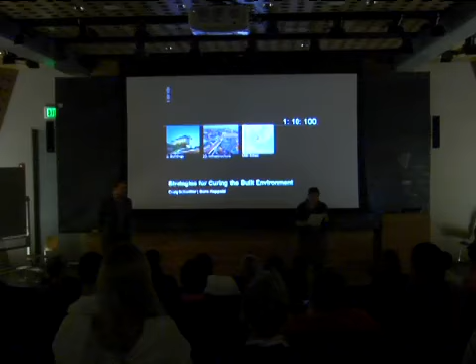Which is a firm that from its very inception has been concerned with the intersection of technology and engineering with art and architecture. To quote the founding partner, Sir Edmund Happold, "A world which sees art and engineering as divided is not seeing the world as a whole. It is technology that is creative because it gives us new opportunities."

The firm has been very much at the forefront of the intersection of engineering and architecture and has consulted on such projects as the Millennium Dome in London and the glass roof on the British Museum with Foster & Partners. The firm consults on a multidisciplinary array of technology applications for designers spanning structural, mechanical, geotechnical, lighting, facade, sustainability, and does these things at the three scales of the building, infrastructure, and the city.

Craig Schwitter holds both bachelor's and master's degrees in engineering from Johns Hopkins and MIT respectively. He has worked on numerous sustainable buildings and planning projects in both the United States and the United Kingdom, and has lectured on sustainability, integrated design, and innovation of engineering. In 2000, he founded the first North American office of Buro Happold, and under his leadership as managing director for North America, the firm has expanded across the US to major metropolitan areas and now has 200 employees. His focus is on integrated engineering with a special emphasis on low carbon and high performance design building issues.

In 2001, he was appointed the first Bedford Distinguished Chair of Architecture and Engineering in the Architectural and Civil Engineering departments of RPI. Recent projects that the firm has undertaken out of the US office include the High Line in New York, the RPI Experimental Media Performing Arts Center, the Visitor Center at the World Trade Center Memorial, and the Walton Museum in Bentonville, Arkansas. And he wouldn't let me mention any of the awards that the firm has won, but I think it's important to note that in the last year alone, the US operation of Buro Happold has been recognized for engineering excellence across a series of fora that stretch from lighting design to the American Institute for Steel to the Royal Institute of British Architects. So, welcome.

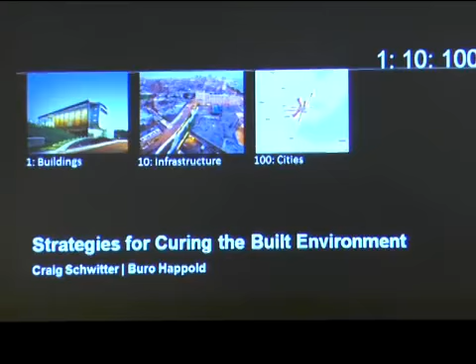That was great. Thank you very much. That's a little embarrassing, all that stuff.

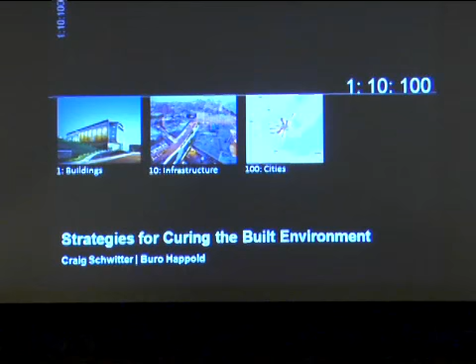But anyway, I'm here to talk about the work that I do and the work that my firm does. I'm an engineer. I like being an engineer. Just want to make sure everybody knows that in the room. But I am used to being surrounded by architects, and I have, after about 20 years, managed to befriend most of them and have good working and collaborative relationships. I want to talk today about really what's on my mind after half my career at Buro Happold. It's been a great place.

I've grown as a structural engineer into doing infrastructure and at the moment doing city scale type work. And I wanted to really show this type of connection that we see as a firm between different scales of projects, between 1, 10, and 100. I continue to see the world as a very connected place, and solutions and strategies and value to be part of that kind of connectivity between these issues.

So just to kind of riff on the theme, really the biggest issue is curing our environment. Our environment is dying. It's being killed by us, by design, by intentional things that we do and we've been doing for many years. And we have to stop. And I just want to try and show some of the ways I think that we can start stopping that and hopefully correct the course.

My firm is global, which is a benefit for me because I get to work in both, shall we say, Western markets or shrinking markets and emerging markets or growing markets. We work in places like India where you're putting up a building every other second. We work in places like Detroit where we're actually working to restructure infrastructure to re-densify the core of the city. Very, very different types of problems.

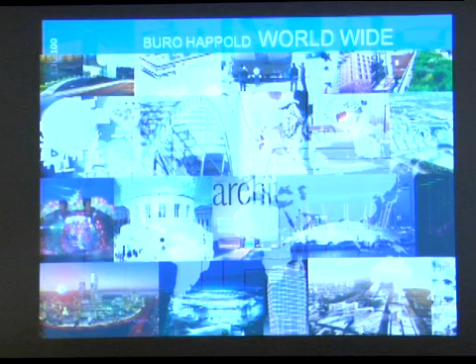But we do have offices here in the United States, which is where I tend to operate. I live in New York, but I also work from New York and Los Angeles on lots of projects around the world with great collaborators. And this is just a kind of a hodgepodge of some of the stuff that we've done. I've been involved in things like the Millennium Dome, stadiums, cities, new cities. This is 60 million square feet in the desert in Saudi Arabia.

The Louvre Museum in Abu Dhabi. Also, as my career has evolved, I've been very interested in structural technologies and lightweight structures, but that idea of lightweight systems and touching the earth lightly has kind of evolved for me. And it's evolved in large part due to what Ted said as a culture in our practice.

Ted passed away in 1996. I was really lucky as a graduate engineer to get to know him. He used to drink these Bucks Fizz things, and he'd give you a book and say, read this book on Jean Prouvé, and he was great. But he had this idea that there's a bigger picture out there.

Even if you're an engineer designing a beam or an HVAC system or lighting or a road network or sewer or street grid or planning for carbon reductions, there's a bigger picture. And this is something I go back to virtually every day. How are the things that I'm doing today impacting things, impacting people? And this is the issue.

The carbon footprint is everywhere. It's amazing. I travel a lot, and it's on the tip of everybody's tongues everywhere, except for the United States, where we're somehow politically putting our heads in the sand yet again and thinking that carbon as a problem doesn't exist. But it does, and we'll get through this nonsense and realize that we actually lost a couple of years of really good productivity to actually solve this problem.

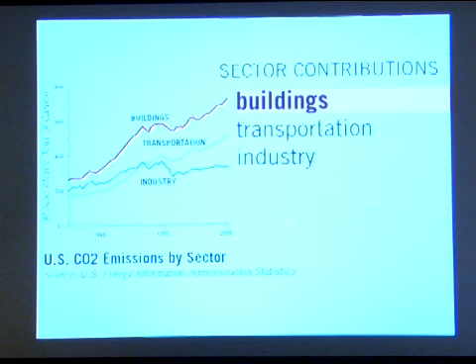Now, some background here. Hopefully everybody knows this, but I'll just repeat it just in case you don't know, that buildings take up the most important area in carbon. Buildings take up between 40 and 50% of carbon emissions in the United States. It gets worse, because if you're in a dense urban environment, 75 to 80% of your carbon's coming from buildings. Because you've actually already optimized your transportation networks, and your industry is starting to move out, or has moved out, or is a smaller footprint.

So if you're looking at dense population centers like New York, who set carbon limits for the 2030 challenge, 18 years from now, this is a major issue. What are you going to take, 75% of the buildings away in New York City? I mean, it is a very difficult, knotty problem.

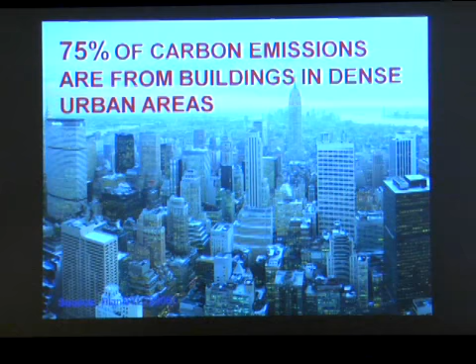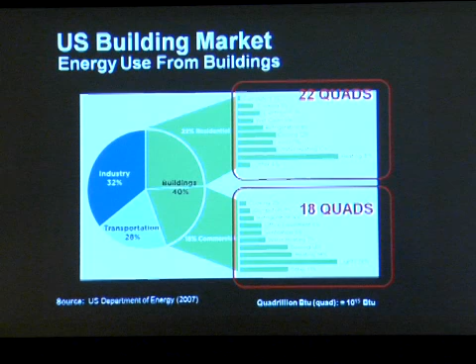And this is, just to give you a sense, residential and commercial quads of energy, or big units of energy, just showing where energy goes in buildings. Cooling, refrigeration, electronics, office equipment, water heating, lighting. Lighting actually jumps out at you here, especially in the commercial area. Almost a quarter of our energy goes into lighting in buildings.

And another element to really understand, and this is particular to the US marketplace, is that buildings have 70% of our electrical consumption. That's an important factor. So buildings drive electricity consumption. Primary electricity is generated by coal in the United States. And that's a big issue in terms of unlocking strategies for energy reductions in buildings.

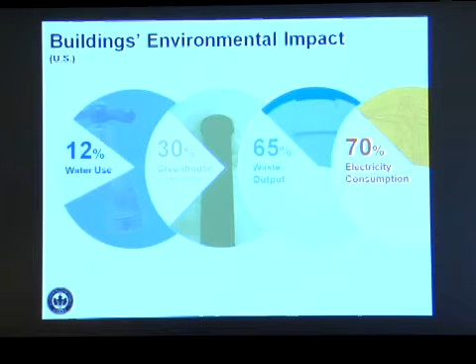So, how does the market respond to all this? Again, I'm a market guy. I'm not a Republican, thank God, but I do believe that we have to find these economic linkages to solve these problems. And the market is pushing.

LEED has done a tremendous amount, and there's all kinds of other systems around the world. If everybody thinks that LEED is the only one, it's not. BREEAM, and Estidama in the Middle East, are all very aggressive. And one of the nice things about these systems is they're setting benchmarks and consistently lowering the benchmarks. This is actually just simply regulation, which is good.

I was at a conference a couple of weeks ago with the ex-director of the EPA, Carol Browner, and we were talking about regulation. It's amazing how regulation is seen as a bad thing right now. But regulation for this problem is necessary. LEED is important. When Boston says all buildings will be LEED Silver, and LEED then reduces the energy benchmark the next year, all buildings in Boston in the future just got more energy efficient, under the radar screen. No politics at all. So this is a very important issue about how the market's responding.

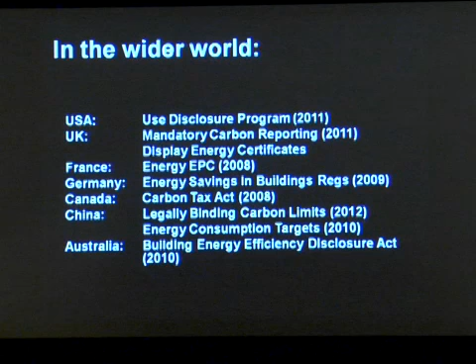In the wider world, you've got a whole series of things. I would say that the USA is behind, but on a state level, it's actually pretty ahead. But on a federal level, it's behind. But UK, France, China actually has some very stringent legally binding carbon limits coming up next year. That's exactly why we're doing a lot of work in China right now on low emissions and low carbon development.

And companies, corporations, as evil as they may be from the Zuccotti Park point of view, are actually following suit, and they're trimming their sails, and they're doing the right things. We work with Marks and Spencer in the UK. We work with some companies in the US, and they see it maybe a slightly different way, but they're looking at these issues. The Carbon Disclosure Project, which is a very large project for Fortune 500 companies to actually disclose their carbon use, is an important area.

And I think different people, and we work with different types of client types, are seeing this problem and trying to get ready for what's coming in 5 to 10 years. The market's also responding, interestingly, that people want this product. I was at another conference recently talking to some developers, and this was a pretty old dyed-in-the-wool New York developer, agreeing that there was a new value proposition out there for development.

He still thought that 80% of the market wasn't paying for it in New York City, but he also agreed that there's certain areas, and this is rents in Battery Park City, looking at higher rents for more sustainable or green type buildings or improved air quality. These are all also issues that I'm very interested in, these types of metrics where buildings, or elements of infrastructure, improve quality, because the value behind these pieces can really unlock why you want to be doing these things, why you don't just want to be doing BAU, business as usual.

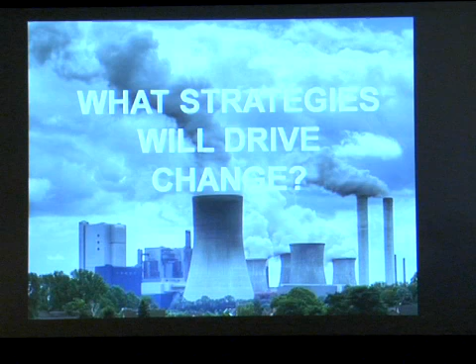And the first is at buildings, and this is my first observation on buildings. We've moved, I would say, in my short career, from sort of the mid-90s to now, from the built environment being about materials to being about energy and performance. I used to go to interviews and be asked, what do you think about the size of the foundations or the weight of the steel? Should it be a steel or concrete building?

And we go to the same interview now when we're doing mechanical and structural, and we don't get a structural question. We get, what about LEED? Does it cost more? Are carbon taxes coming? What about the HVAC systems? Lighting, can I reduce my bills? These are the types of things that we talk to university presidents and CEOs about. This is what they're interested in. I haven't had a CEO or a university president ask me a structures question in 10 years.

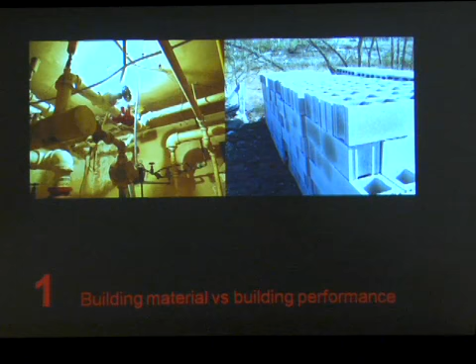I'm not quite sure exactly the overall phenomenon, but I do know it's moving from materials to this. We are understanding that buildings and our environments are about performance somehow. It's sort of implicit, and yet it's also not implicit. This tries to show what I'm talking about.

We just started a $400 million building in Pittsburgh for PNC. And at the opening, I said to the head of real estate, he said, $400 million, it's a lot of money. I said, you're spending $4 billion. He says, what are you talking about? The price just went up? And I said, no. Over 30 years, PNC's spending $4 billion in Pittsburgh. That's what you're spending. You're not spending $400 million. That might be our budget, and you might have operating costs.

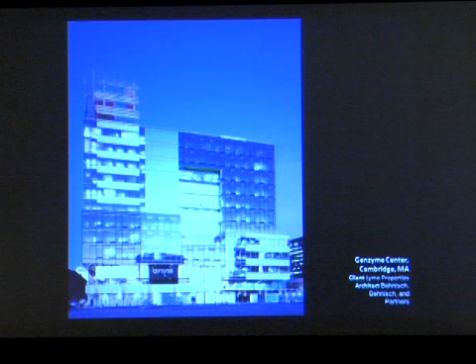But this is a project we did in Boston where these strategies really played out. This is probably about the 2000, 2001 timeframe. Stefan Behnisch was the architect. He had a lot of these strategies integrated with his architecture, and he did a very good job explaining them to the CEO at the time. This was a spec office development initially, which Genzyme fully bought out, and the developers were happy as Larry because they made a lot of money off of it.

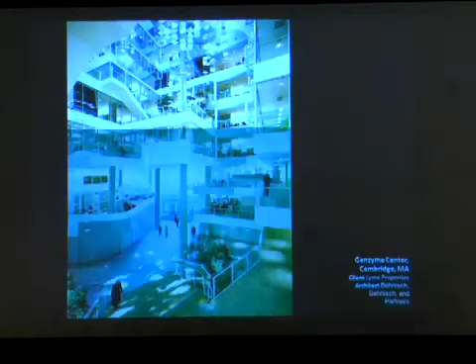But the one interesting thing is we have a central atrium cut through the building that has a very innovative lighting system. We didn't design this. This was by a German firm, Bartenbach, who are fantastic lighting designers. This building has great natural daylight all day long. It's a 14-story building, so normally you wouldn't get that type of daylight penetration, but you get very good daylight penetration. And so Henry Termeer, who was the CEO, got this whole equation.

He said, what is my upcharge for actually investing in something that will have better lighting, will have better indoor air quality, will achieve these types of issues? And this ended up being the product.

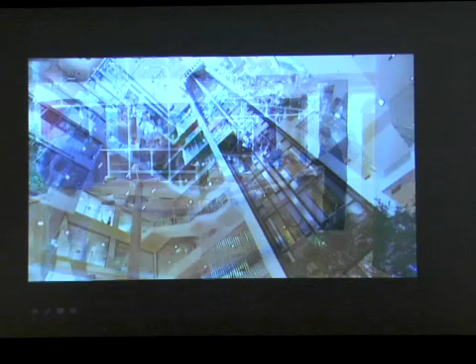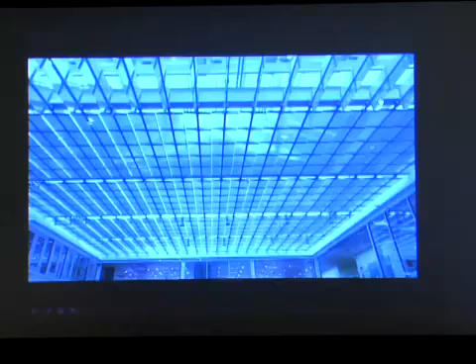This is just looking through the atrium. One of the things that Genzyme wanted to do is connect it into the street. Genzyme had a problem in terms of public perception, so you can just walk right into the building, right off the street. These chandeliers look a little funky, but they're all part of this daylight enhancement system, which actually takes light from a series of mirrors and directs it through prisms down into the body of the building. So basically you get natural daylight in any conference room all day long throughout the building.

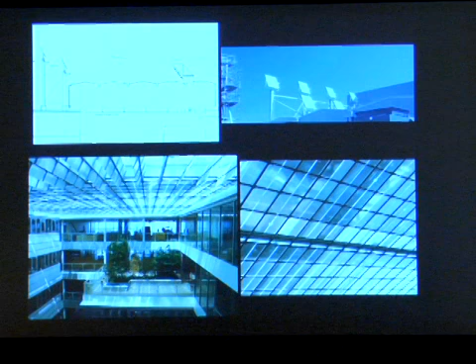So this is the type of building that you see inside, showing a kind of a cross-section. Just a new interpretation of an atrium type building. And this is what Genzyme saw, and what we've proved. The building's been operating about 5 years. We keep in close touch with Genzyme, we've monitored a number of times, and they feel like it's already paid back within a 5-year time period, and they have a 25-year lease on the building. They're very happy. Genzyme's very happy.

Second issue, net zero, in terms of it becoming reality. I think we as engineers see all the issues associated with this being very difficult, to get absolutely zero emissions on a building, and also you can talk about how boundaries are potentially fictional on what is net zero. But in any event, I think that we are approaching that issue. For those of you who don't know, Living Building Challenge is probably more aggressive than LEED. We've done one of the first Living Building Challenge projects, which is this project I'll show, which actually requires you to monitor the building for a year and have it net zero.

So this is a preparatory academy that we finished in Hawaii about 2 years ago, and their slogan is no credits, just prerequisites. Living Building Challenge is about net zero. And this is a great site, a site that you can make net zero work. It was a great client, a client that you can make net zero work on too. So those are good starting points, I'll be the first to admit it. But it was an interesting project nonetheless.

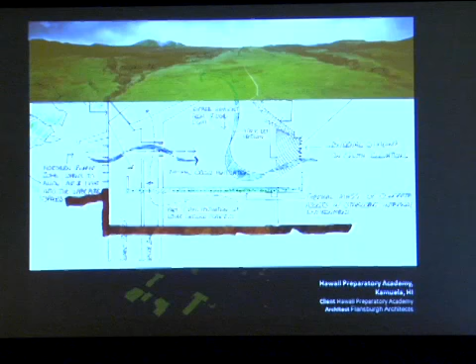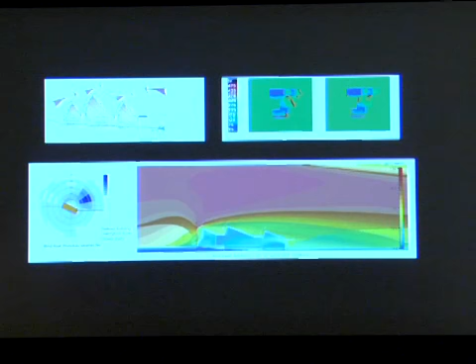It starts with a sketch, starts with really understanding how a naturally ventilated building would work, trying to get the energy as low as possible. We did fairly extensive modeling to look at the prevalent wind patterns, to make sure that we were getting the right type of air distribution and ventilation patterns inside. And this is the end product. It's a great space, and the client's very happy with the building. It's a multi-age preparatory academy. And this is part of the issue about all these things that go into your energy in a building.

So your initial demand of the building, this is the strategy for any net zero. If you're ever going to do a net zero building, hopefully all of you will within a short period of time, you have to look at what your CBECS or your average energy take would be and reduce that. So look to reduce demand. You can't make net zero work with increased demand. Look to reduce demand to a point where you can balance it with renewables. Normally, the strategy that we try and take is 60 to 70% reduction of energy and 30% uplift for renewables will get you to about that balance point.

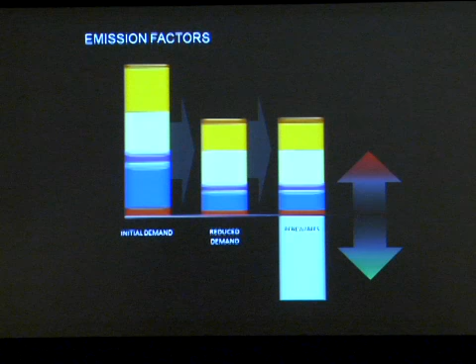And they've done these surveys about the building, both kids and parents, and this issue about liking that environment. This is a great environment. It's a well-designed environment. So the statistics are playing back what we know, but it's nice to have that in play. Third theme here, simulation.

We love simulation as engineers because we get to play with computers, and it's a filter for data, but simulation is really going real time. I think one of the major issues in MEP and energy engineering is just simply simulation. The tools and the computers are so much faster. We could do modeling in a fraction of the time that it used to take us even 3 years ago. So that is really changing the design process.

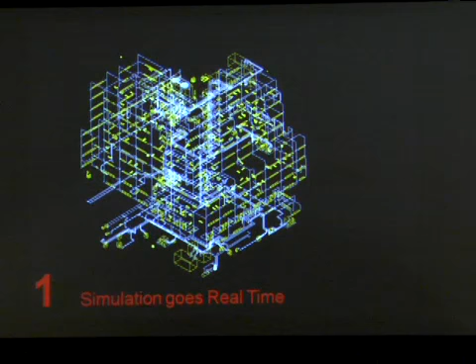The tools are just coming, I think, at the right time. Still a little crude. We still have to kind of garage sell them together and tape them together with duct tape to get them all to work. But thermal and energy modeling is key. I don't know how many of you have even heard of thermal or if you've done any work in your classes. You should know about it. You should start understanding what it is. You should start getting familiar with programs. Ecotect does very simple pieces on this.

Every one of you in this room is responsible for this, not your engineer, all right? Every one of you is responsible for having an intuitive understanding of how to design. I'll help you. I'll check it. But I tell you what, I get really pissed off when I'm working with an architect who doesn't know what they're doing. It just makes me mad. It's not to say I don't make money off of it, I do. I'm a consultant. But I'd rather actually work with somebody who knows what they're doing, like Stefan Behnisch, because you can go so much farther and you can make so much more of an impact.

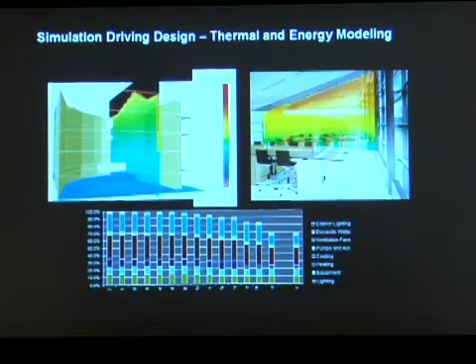This is a big issue, and I really want to make sure people understand this. They're not afraid of these tools. One of the things that we're trying to do is develop tools that allow you as a designer or a lead designer to play, almost like a video game, with these tools. Not to make it like DOE2, like, oh my God, this is a black box, but actually like what happens if the building turns, does the energy go down or up, almost gaming it to the extent of understanding those intuitions.

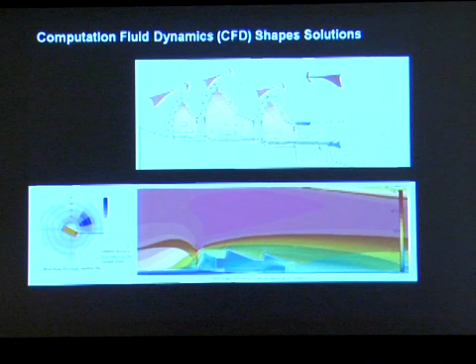CFD is more complicated. I don't expect people here to do CFD. That's computational fluid dynamics, but it's very important for thermal movements of airflow, ventilation, things of that nature. These are just models that we do pretty much day in, day out on various projects. These used to be models where you would do a kind of crazy design and then send it off to some computational expert somewhere in Canada and get it checked. We do it now real time. Not like that minute, but we do it within a day.

And I think this idea of that feedback loop, it's not we're checking it anymore. It's not that I've just over-designed the MEP systems and I have to check it to make sure that I'm not going to get sued. I actually am able to use these tools to right-size the systems right there.

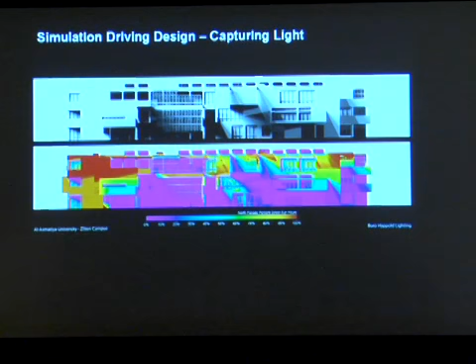Capturing light is really important for simulation as well. Daylighting, as I showed you earlier, lighting is like a quarter to maybe even more in terms of the footprint of energy of a building. And this is critical. A lot of great lighting tools out there, and I mentioned daylight before.

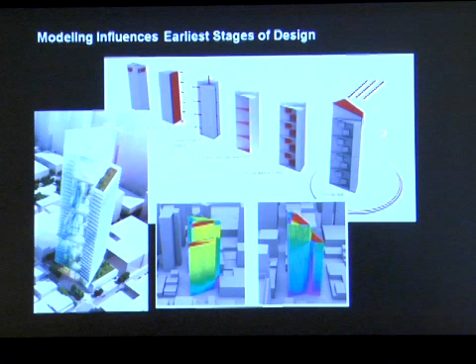And all of these things start mashing and forming the earliest stages of a design of a building. This is a tower that we've been investigating in Pittsburgh, this PNC Headquarters project, just looking at different aspects of orientation on this. And this is not the tower, but this is the software that we've been developing, which is at the earliest stages.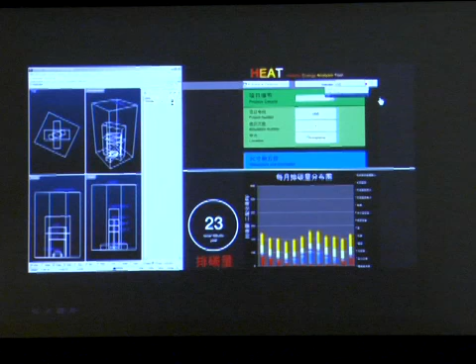We're not waiting until 6 months down the road, or somebody has this perfect, like Chippendale kind of tower, and then they say, what's the energy performance on that? Which has each side of the box the same facade type, which I've never understood.

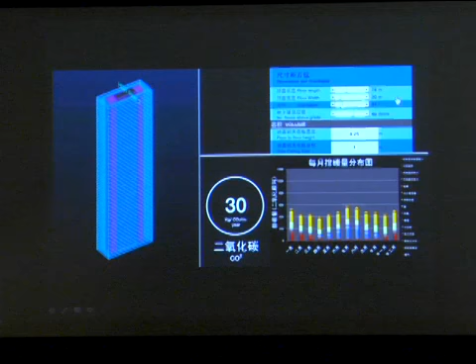No, we're trying to say at the early stages, what happens if we twist? What happens if we make it taller? We thin it out? What kind of orientation? What kind of spatial issues are there? What kind of issues are there in terms of the energy performance that you can do for virtually no money up front that can save you huge amounts of energy impact?

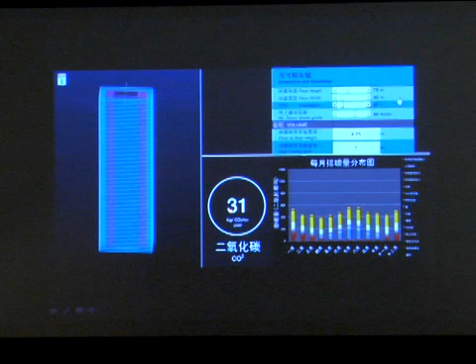These are the types of tools I said that we're putting together with duct tape right now that are really tough. These are the energy profiles and the carbon counts that we're getting from these different types of design moves. We're trying to do this almost in real time for the architects that we're working with. I'd say almost. This is probably like half a day type turnaround stuff.

We might have a multi-day working charrette. Somebody will take 3 or 4 options of looking at different buildings. We'll analyze them overnight, we'll bring it back for the next day, and we'll start playing around with it again. And I think within a year we'll probably get this to the point where you can actually just sort of manipulate it almost real time.

Do you have a question? Yeah. Okay. No, you can ask it now. I don't mind. Yeah, yeah. Well, you can.

You can. I mean, we know where the sun is normally, and we know that we want to make normally southern exposures longer. I would say the best tool use is actually taking intuition and pushing it further, not just kind of shotgunning it, or monkeys in a room trying to type Shakespeare. It's following that thread of intuition. So we know basically for site orientation, wind orientation, what we should be looking at bracketing.

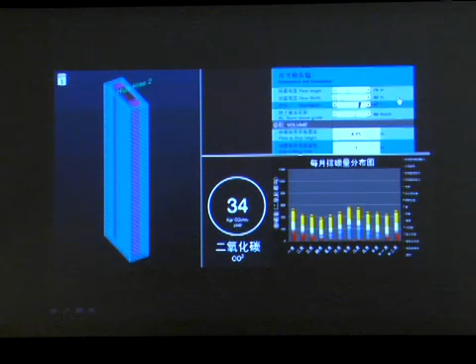Also realize that the numbers we're getting out here are just estimates. I'll go into EUI, but we like to call these predicted values, not because we never like to be pinned down on anything as an engineer. But yeah, it's got to have a factor of safety built in somewhere.

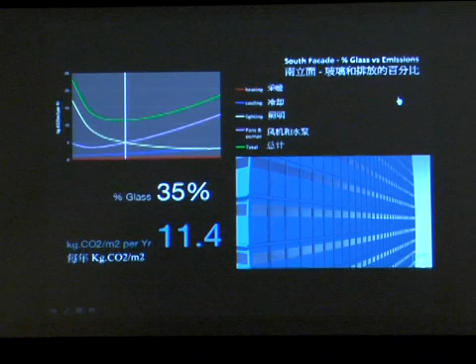These are just looking at glazing ratios and trying to understand how that affects, again, simulation type of things in real time. And these types of graphs are looking at these crossover inflection points, looking at what kind of sweet spots we might see in the design. So you'll see these types of graphs come up again and again. But they tend to be strategies from here, which is one option, all the way down a kind of pathway.

And one of the interesting things also about energy use here, you ever see the film Apollo 13? When he's trying to get the energy low and he's doing this one and that one. Actually, it sometimes depends on the order that you do them in. They're not all additive. In other words, if you take underfloor air and then you add ventilation, then you change the orientation of the building, and then you use a solar chimney, but if you change the order around, we sometimes get different numbers. Now that might be a fault in our modeling, but we don't think so.

We think it's actually that there's something about the order of what you do, and the strategies sometimes get you to lower numbers. So we'll see. We haven't gotten to the moon yet, but hopefully we'll get there. I'll leave this and we'll jump up to the next scale.

But this is now on the back side of what we're doing, and it's actually disturbing. Because as we're looking for computation, energy efficiency, and all these other things, there's a difference between energy intensity and energy efficiency. Okay? Now, I know you're going to hate me. This is an equation, but this is something you should all know. If anybody doesn't know it here, please remember one thing from my lecture: what EUI is. Energy use intensity. It's miles per gallon for buildings. You need to know this.

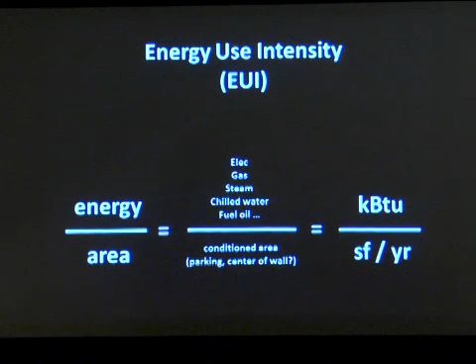You need to know the miles per gallon of every building that you will do going forward in your lifetime. Please, promise me one thing from tonight, okay? Because this is really important. This is a simple but key metric for measuring building energy use. And the problem, well, I won't get to the problem yet, but this is just to give you a sense of metrics.

90 is about the typical EUI for a building. A building at 30 is very, very low. Different buildings have different types of profiles. So a healthcare building will have a very high energy use intensity, which makes sense, and an education building will have a lower one.

But this is a project that we did for 6 million square feet in New York. It was a developer trying to reposition their assets, Trinity Real Estate Holdings. They own this whole series of older buildings around Hudson Square. This is the Holland Tunnel right here. And they had a lot of buildings that are Class B or Class C. They're older buildings, casement windows.

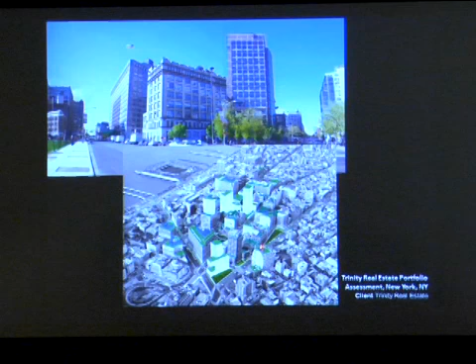And you walk into these things, and the wind was blowing in them, and the steam was overheating. You were like, this is easy. We're gonna move in with some energy efficiency measures. We're gonna nail this thing. We're gonna have the happiest client ever. So we did this, and it was a series of buildings. We did a number of energy audits, and we found a really interesting statistic.

After we did or projected to do energy improvements, the energy uses all went up in the buildings. Up. They didn't go down. The client hauled me in by the collar and said, "What the hell are you doing? You're putting in lighting upgrades and HVAC upgrades, and this is what I'm getting. I told the mayor that we were going to go down on carbon use, not up."

He called me a couple of things, and I said, well, the issue here is that the projected energy intensity of the new companies is higher. It turns out, even if we do the energy efficiency upgrades, the new media people coming in are actually using more power. They're using more plug loads, more computers, more lighting and office equipment. So this is a really tough nut, because it's probably out of my sphere of influence, but it goes down to behavior and also technology pieces.

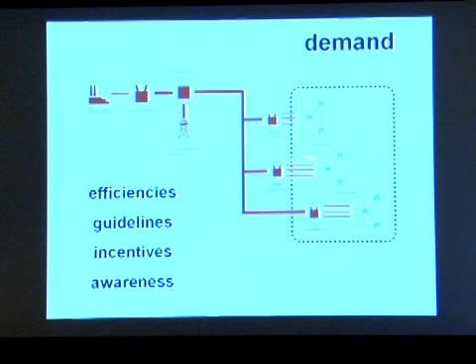Onto infrastructure, energy supply and smarter grids. This is just looking at how, pretty simply stated, we have transmission and we have demand. And this is how it works right now. But we really need to think about this in terms of, again, bringing that energy demand down, because actually what happens is your power is developed here and your power is delivered here, but it's very inefficient to get from one to the other. And so these power plants, 100 to 1,000 megawatt type power plants, are coming through grids that are extremely inefficient.

And we have done a number of projects that look to distributed grids. New York City has a plan to put in more. I'll show you a little bit more cogeneration. But this is something that's happening a lot in developing countries, less in the United States. And the reason why is that 100 units of energy at a coal plant ends up at 30 at your house. Over 60% of the energy is lost at the power plant and in the transmissions that get to your house with coal. Natural gas is better. It's a lot more efficient. But coal, which drives, remember that electricity piece that I was talking about earlier? This is a real problem.

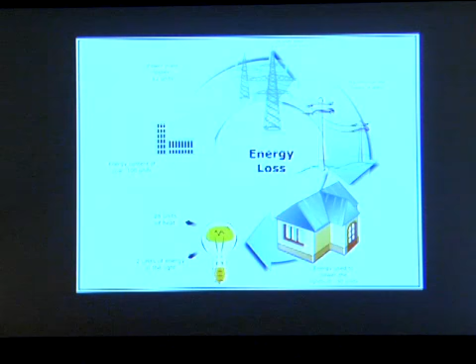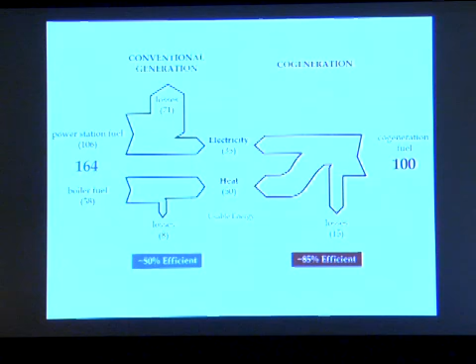So the grid, again, this is not something that you can deal with at a building scale. Now I'm sort of scaling up. When we're talking about maybe developments or areas of cities, we really want to start to look to more distributed energy generation. Cogeneration is interesting, and cogeneration is just developing and burning and creating energy at source. So you could have a cogeneration plant, a 4-megawatt plant that actually generates and delivers power to your building. Think about how much more efficient that is than buying that power from that coal plant, 500 miles away.

The utility companies do not want you to do this. They do not want you to be generating that type of electricity. It's going to put them out of business. So this is a problem, because utility companies are a real obstacle, honestly, to this type of energy efficiency piece. But it's as clear as day what the solutions are.

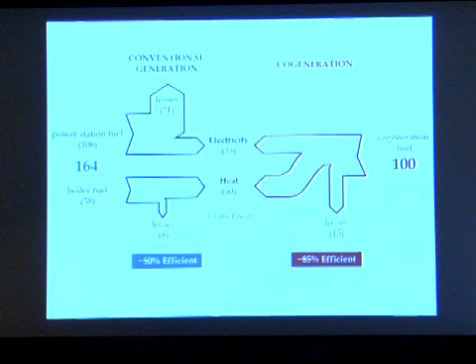It's pretty rare that we get to put cogeneration into buildings right now with our clients in the United States because of the economics. Because that energy generation is so cheap at source that it doesn't make any sense. It's more expensive to do it at the building source. Even though it's more efficient, it's more expensive. This goes back to that value piece and regulations. If it's cheaper to burn coal with no regulation, then that cogeneration is never going to happen. We're always going to be in an inefficient spiral on the grid.

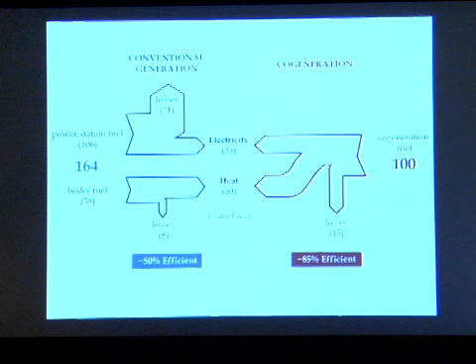And I know this author, Greg Kats, who does a book called Greening Our Built World, looking at the links between economics of carbon. Carbon right now is technically priced at about maybe $15 to $20 a ton, although that's like people buying carbon credits, so you could argue that it's free right now in the United States. There's no penalty to spew carbon out onto the streets in Syracuse or New York.

But what he's arguing, and I think his metrics are right, at certain prices, your reductions of energy become significant value on a year-to-year basis to a landlord. If your rent is $30 a square foot per year, when carbon is priced at $50 a ton, and you have to either pay that via the building or your landlord, you could be seeing something up to 10% of that cost being the cost of the carbon.

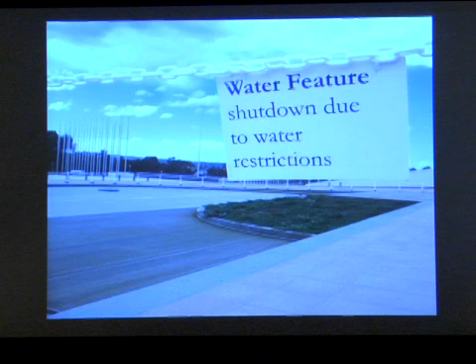On to other infrastructure pieces and away from carbon and energy for a little bit, in terms of water, but also in terms of, I'd say, naturalistic design that we see. Water management integration is key. There's a lot of areas of the world where water is an incredibly scarce commodity, maybe not in the Northeast, but we see it in California. Also, we see it a lot in the Middle East. And we did a project in Saudi Arabia. This is not Saudi Arabia. This is California, actually right near our office in California.

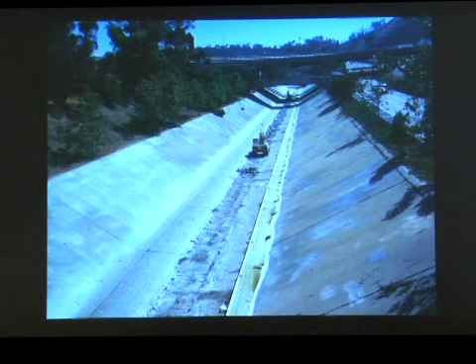And I'm always amazed by these giant swaths of Los Angeles that are just taken out by these engineered things in the middle of stormwater basins that rarely fill up. And when they do fill up, it's pretty dangerous. But we had the same situation in Riyadh. Riyadh is a population of over 6 million in the city. And in the middle of the city, it had a wadi, which is basically a dry bed river that was being used and disused right in the middle of the city for trash dumping and all kinds of things. But it was essentially a wadi that funneled water down. And at a certain point in a 20-year flood, this thing floods like 20 feet, and it's a catastrophic event.

What we did was we actually engineered through the pieces of the city, and this is a long-term project, a water management system to actually create a park instead of just doing giant culvert basins and smashing it through the city, because Riyadh didn't have a park. Riyadh has very little open space inside the city. It's choking itself to death right now because of the development going on. And this has become a newfound public space. And I think this is something that evolved over a period of years for us. It wasn't like we had an aha moment initially.

And a number of other cities, Seoul in South Korea has a similar type of reclamation that's happened. But it's very interesting that we see these natural types of moves of dual use coming back again and again. And now that you have public use of these spaces, when it does flood, and we did have a 20-year event, it's all water all the way to sea, but then it recedes again and the park goes back to normal. So we've actually engineered a park that can be that natural system at the same time.

Another theme is urban efficiency and renewal in cities. And we like this because we like to kind of get in the guts and grit of things. I was fortunate enough to be on the High Line with Diller Scofidio and Field Operations. And we won the competition in part by really playing up the fact that we don't want to rip this thing down. We don't want to do some giant repositioning of it. We actually want to treat it pretty much as an artifact that we just strip down and we put some simple things back into it.

There were a number of teams that were going to put roofs over it and make it a building, and Parsons Brinckerhoff was saying, we'll just take it down after we win the competition. I mean, it was interesting. Really just treating this as a piece of urban fabric, and the result has been great. It's a great project. We're working hopefully on phase 3 right now. Even the developers are seeing the light, and it's been amazing in terms of generating all this value adjacent to it in terms of tax-based revenue for New York City.

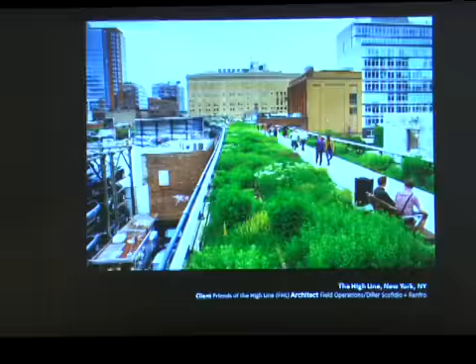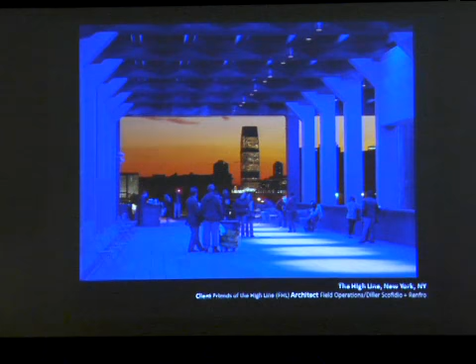And you have all these found moments on it, and it's this sort of grittiness to the city, this urban regeneration and renewal, this reuse, and I'm proud of being part of those projects. There is also an energy piece to it, which is a little geeky, about embodied energy and really maintaining that type of existing fabric. Not being a slave to it, but in this case, maintaining that existing fabric was a really strong strategy. This is another piece. It's a little bit more at building scale, but again about maintaining existing fabric.

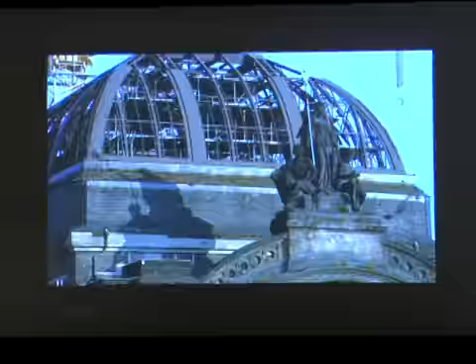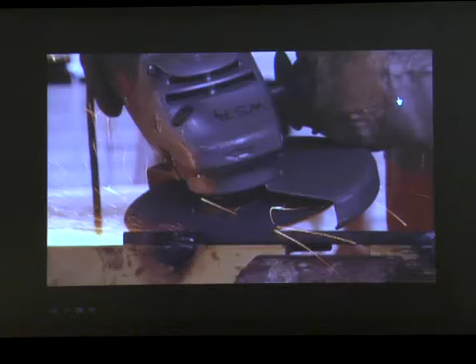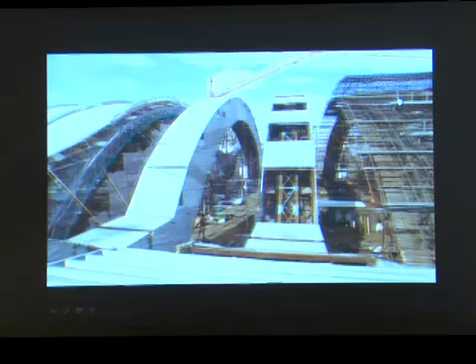This is a transportation project we were involved in in Dresden, Germany. Foster and Partners were the architects on it. This was after the fall of the wall, and 10 years into it, the old Dresden station was literally falling apart. It had a roof structure that had to be removed because the old steel structures were about to collapse. But instead of putting a heavy roof back onto it, we could put a light roof back, a thin fabric-coated roof, and that would save the existing steel structure. So instead of destroying the whole station and starting from scratch, which, to be honest, is easier, it saved the existing fabric of the station.

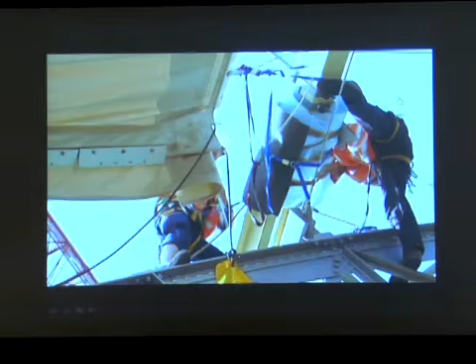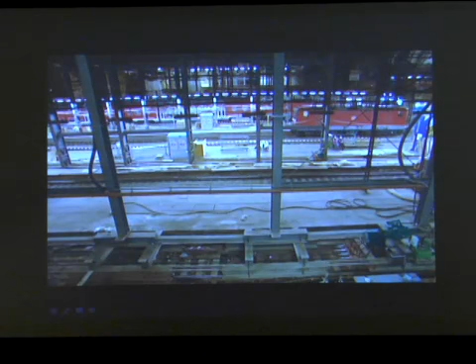And I think this goes back to the linkage with where I started, with lightweight structures and touching the earth lightly. It's nice to see there can be a connection between that type of technology and preservation. So these are the panels being hauled into place. These are the trusses that were preserved. They set up this crazy thing inside. You know, Germans, everything's precision and beautiful. But this thing moves along as the trains are coming out, and it was the scaffolding. And this ends up being the coating of the roof. And this is the roof inside.

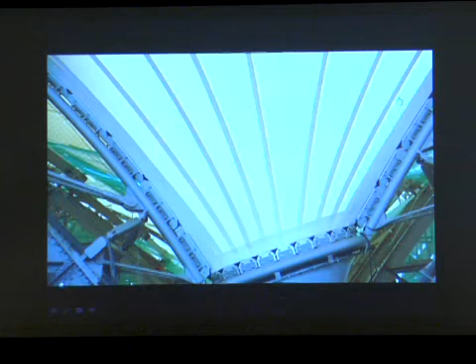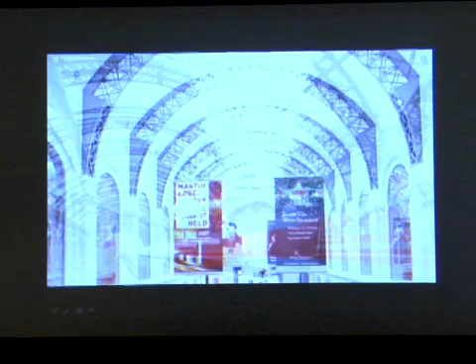Architecturally, you get a completely different read on this, because now it's not some smoky old station roof. It's a roof with incredible lightness, but yet the existing roof has been maintained. So maybe it's a bit of a stretch to link this to the High Line, but in our minds, they're similar strategies in terms of urban renewal.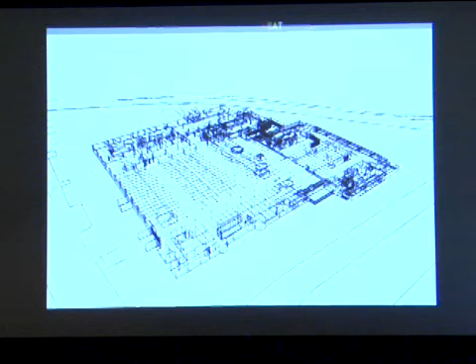So finally, on to cities, the broadest area that I'm doing. And this is where we're really struggling a bit. We're getting inundated with data on cities. At a city scale, you see all this IBM smart cities stuff. Tapping into that is absolutely crucial, and we know what we need to do with it, but it's still a struggle. And at a building scale, most of our buildings are done in Revit now. We have Revit catalogs. Pretty soon, in 20 years, you're going to have a catalog of every building in the city. You're going to have all this data at your fingertips.

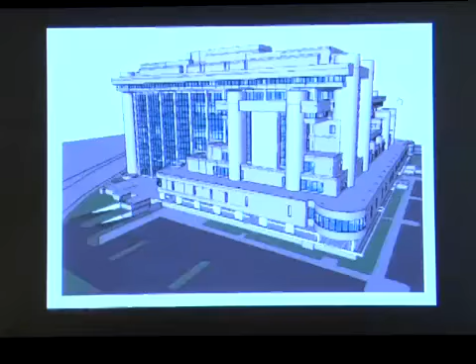The question is now, like, what are we doing with the data? And again, I don't have an answer to it. I'm just saying as a theme, you know, this is a GSA project. This is a giant courthouse that I can't tell you how inefficient the energy was on this.

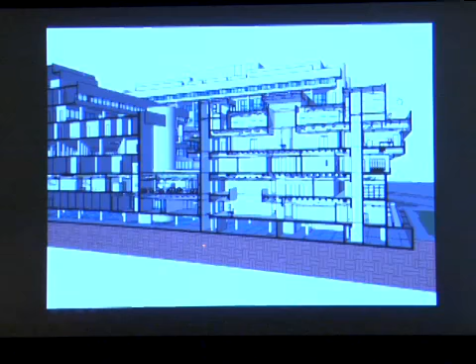Single pane glazing. They ramped up all the air conditioning systems, so the whole thing was super cooled, and then people brought in space heaters because they were too cold. And it's in Hawaii, which you can naturally ventilate to start with. So I don't know, you know, figure it out. But this shows all the mechanical and the ventilation systems that we model for the GSA, and, you know, just again, kind of information overload.

But what's coming out and what we're seeing are these types of benchmark and performance metrics that are becoming a lot more straightforward to read, and I think we'll be seeing more and more. I think buildings will be benchmarked. I think they'll be publicly accessible. I think they'll be accessed on iPhones. You already can. And I think this is an area where we're interested in seeing it. And as a portfolio piece, this is interesting in terms of just browsing performance.

We've been working with some universities, this is UC Davis, about looking at their portfolio buildings. Because as you start moving into all these portfolio buildings, how do you gather all of this data up and actually start to make informed decisions? In fact, and not a project I'll show here, but we're working with the World Bank on something at a bigger scale called a rapid assessment framework for cities. So we go in and establish energy benchmarks for cities that actually don't have it yet.

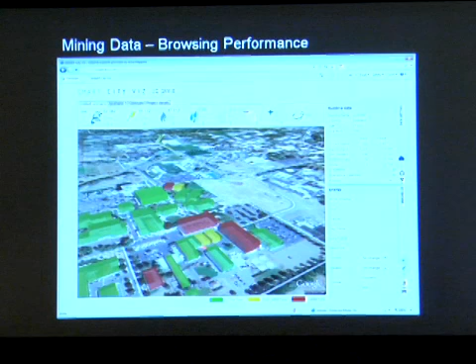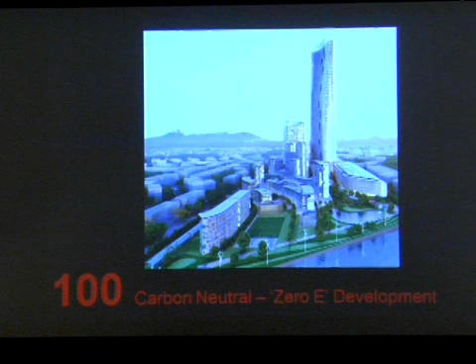They're normally second-tier cities, like we just did Surabaya in Indonesia. We're doing Quito in Ecuador. Cities that actually don't have these types of metrics at their fingertips. The World Bank is hiring us to go in for 3 weeks. We do the calculations and give them at least some ideas of what's going on. But again, a lot of university owners are coming to us for this, and probably just getting off of data onto looking at carbon neutral now from a development point of view, not just a single building.

This just shows a development in China that we have been proposing, looking at all of the systems and how they're all tied together. And this is where it starts getting really complicated, but also really satisfying. Because looking at the energy patterns and use of a city can be a strategy for reducing those energy patterns. Because certain energy patterns and program uses offset one another. Residential pieces tend to offset office, hotel, and retail. We can actually look at the coupling of program to offset energy use.

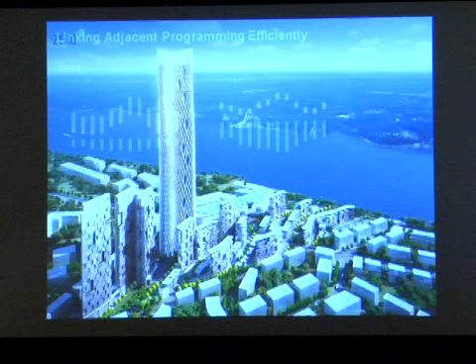So just building all office in one area of the city may not be the right strategy to get to net zero in that portion of a city. This developer in China said, as you do in China, I have 3 million square feet. You know, what should I build here? And if carbon restrictions are so significant to his thinking, because they're just in the planning phase right now, we're talking to them about program mixes that may well help that carbon reduction strategy. And these are just some of the images from the architects.

But you know, I show this graph. It's the same exact graph as on a building scale, but now we've coupled it all to these pieces. So we're going down in our normal strategy way and then looking for a renewable surcharge to hit that. And we think that we can just about get there, starting to get there at a district scale now. And that's what's interesting to us.

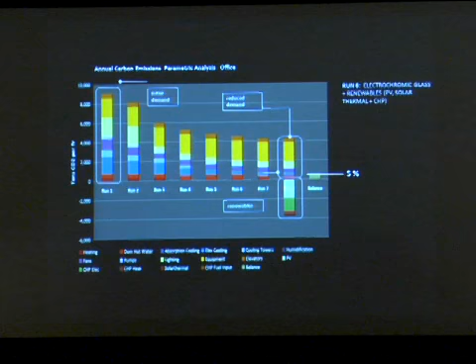We're going from that living building challenge piece, and we're working on some office buildings down in Oregon and other places that I'm sure will hit living building challenge within the next 3 or 4 years, to starting to look at districts. And if you can start to look at healthcare and other kinds of areas, it's really about quality of health and quality of living, indoor air quality pieces that get measured. It's a tougher statistic than measuring salaries against productivity, as in an office building.

How much more would you pay for that apartment that has good indoor air quality if your kid has asthma? I don't know. I mean, that's not an easy thing to quantify. But the fact of the matter is health does have a cost. It has an absolute cost. There's no doubt about it.

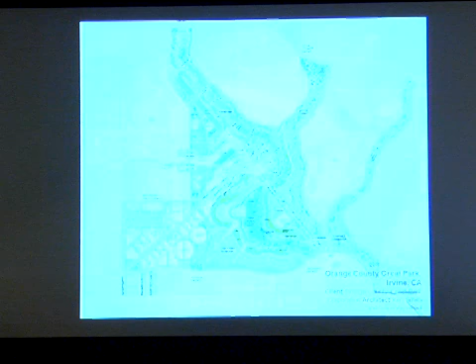There were nice elements of the park that actually repair some of the natural corridors from the mountains to the sea and natural wildlife migration. These corridors will not be accessible to humans, so you can have bobcats and other kinds of things coming in and out of there. But for most of the park, the strategy was about public health. We were going all the way back to the 18th, 19th century strategies about linking health into buildings, and these are some of the other aspects of it.

So, just to end, thinking about it in terms of seeing the world, now I'm 20 years in, and I see all these things really deeply linked together. I see cause and reaction all over the place in the strategies that we're developing for clients. It's not a repetitive thing. It's really interesting to me. It's really challenging. Sometimes I bang my head against the wall. Sometimes we feel we've made real breakthroughs.

But transport, waste, energy, water, it's all mixed together. And when you layer on these scales of buildings, infrastructure, cities, you get a sense of how complex that problem is, yet we're still looking at these individual strategies for solving it. And I just want to say one thing about what you can do as students. Number one, you can get informed, you can read.

I think it's pretty astonishing, for some of the architects of the previous generation, how little their architecture was informed by energy and the environment. I think we see a lot more of it today in the architects of my generation we're working with, and I hope that trend will increase. But get informed. This is Greg Kats's book. This is Bill McDonough's book. This is Paul Hawken. There's some great stuff out there.

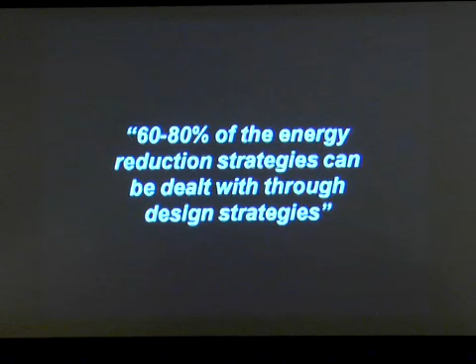And a lot of firms are taking up the challenge, benchmarking their buildings. Right now it's some of the bigger firms, but it's going to happen. It's going to snowball, and we're already seeing that. And these are the strategies of getting down to carbon neutral. So get involved in this. This is real. If you're doing an internship, ask that company, what are you guys doing about this? This is not that difficult.

A couple of phone calls to a client, you can pick out the energy numbers and get your EUIs on that building. Maybe the client's not using the building properly. Maybe they need to get somebody to renovate it or just tune it up a little bit. This is important stuff, because if we don't, we're just going to flatline. Well, actually, not even flatline. He's arguing that we need to get to 60% today, and I don't think we're there.

And then finally, think big. This is a big problem. I'm looking for people to work with. I really enjoy that type of collaboration. I'm not looking to just paste windmills on a building. These are really tough, integrated problems to solve.

They have to be solved with economic fundamentals, no doubt in my mind. And sometimes the economic fundamentals don't work, and you just got to keep moving on and fight another day. But it's such an issue, it's such an important issue. I just want to make sure that I'm sort of getting it out there.

We're entering an era of scale, I really do believe this first wave of sort of quote-unquote sustainability, I think, has really come over us in the last 10 to 15 years, at least in the States and Europe. And I think that we're really looking to amplify that now and seeing what that next wave is. We call it in our firm the third horizon. We call it that next horizon going up.

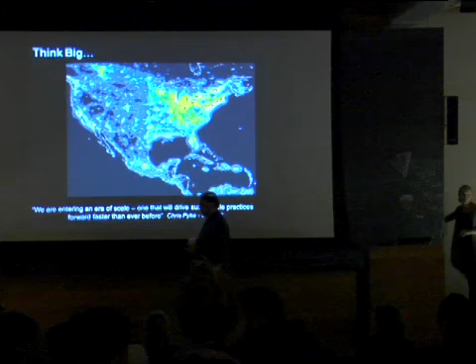Craig, thank you very much for a wonderful presentation. There is a lot to digest here, I guess. And I have a question that touches on a lot of things you mentioned, and that is addressing the issue of methodology. Design methodology, systems thinking, holistic thinking, a much wider approach towards design.

Could you elaborate a little bit, and you touched on this at several points, but how do you see the role of the architect changing, and how our students, when they get out, will be exposed to that? And how do you see the methodology and an interdisciplinary working mode having an impact on that? I would say the role of the architect is going to be more important, actually.

As an engineer, we are increasingly getting involved in other elements of buildings, like facades and lighting, that maybe traditionally were in the architect's realm. But engineering is not a discipline of integration. It's a discipline of siloed thinking. And I'm the first to admit that. I mean, I'm trained as an engineer to break down a problem into silos and solve it that way.

And even though I think as a firm we try and rise above that to be as integrated as we can, we live in a world where people categorize us as engineers. So I think that architects, you're getting the training that is important to think in a broader fashion. And I don't think that these problems are going to be solved in silos. I just don't. We have a saying, one of our rules of engagement: silos don't work.